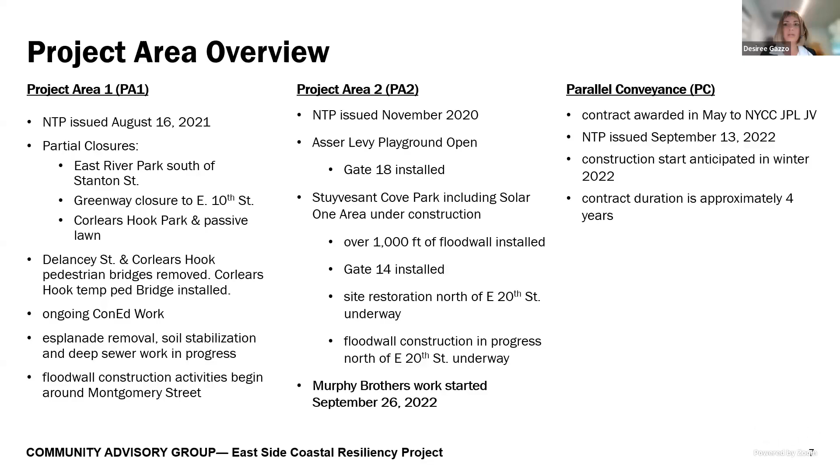For PA2 construction progress, we're familiar with this illustration. The work is finishing up in the northern part of Stuyvesant Cove Park, anticipated to open in November once the planting is done. Murphy Brothers work just started, and work will continue down in Stuyvesant Cove Park to the south. Hopefully by the next CAG meeting, this map image with the work areas will change.

We did just present to CB6 last week. The presentation is up on the ESCR website, and there we presented updated construction photos. If you're interested in a deeper dive into PA2 progress, please go visit that presentation.

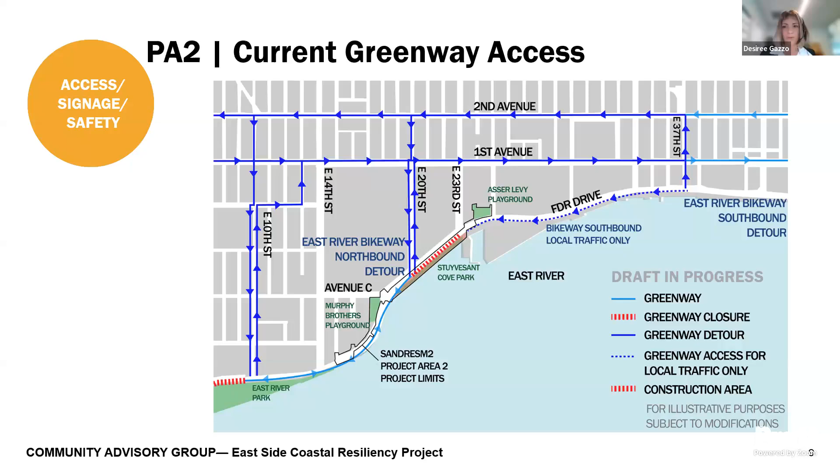For PA2, the Greenway access, we've been presenting that there will be an upcoming change once the northern part is open. This is the current Greenway access, which everyone is familiar with by now, and this is the look ahead, which we've presented the past couple of CB and CAG meetings. This is still draft in progress, as labeled before. Essentially, the Greenway between 20th and 23rd Street will reopen sometime next month, mid to late October, and that will change the detour and what it looks like.

Also sometime mid to late October, the access between PA1 and PA2 may be closed off, so that the PA2 contractor can finish that work in the southern portion. We are working in coordination with DOT now, and as we coordinate with them, we'll have more details and dates to let you know.

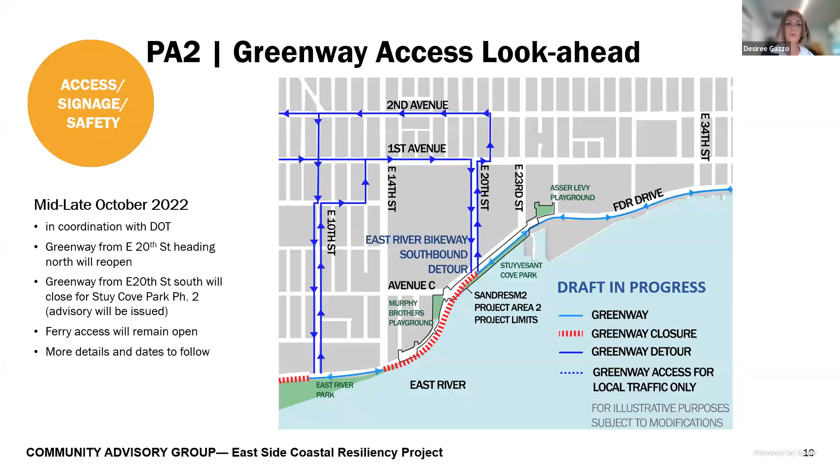This is the same detour we've been presenting, still in progress. As we have more information, an advisory will be issued. We'll let Paula and Tara know, and that information will be shared with the CAG.

For PA1 construction progress, this is a graphic we're hoping will be more similar to the one we show monthly for PA2 — an illustrative graphic of the progress of construction work. The green areas are essentially East River Park proper, the main portion of the park. The blue lines are the bridges and overpasses, and the flood walls and floodgates are the beige line. There are a few up in the north, but we didn't delineate that here. This is the main portion happening currently.

We did have the more detailed schedule we'd provided in the past. This is a little more presentation-friendly and based off that schedule, and we'll use it similar to PA2 to show that progress and speak to the progress of the project moving forward.

For October 22 construction activities, the work is progressing in a steady fashion — not much has changed. The soil stabilization activities, esplanade dismantling, and deep sewer activities are continuing. The Delancey Street utility pile and abutment work on the park side is moving forward, as well as the Corlears Hook Park pile installation for the new bridge.

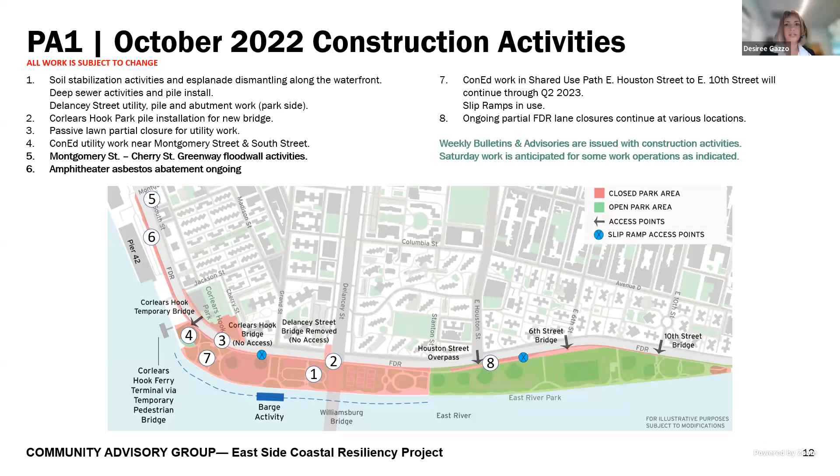For the PA1 AQM August update, there were several occurrences of surpassing the PEL, but they were only for under 20 minutes or less, and there was just one that was a bit higher on the 26th.

And the PM 2.5 levels were similarly all 18 minutes or less. The contractor does get an alert once there is an increase, and then they resolve it through the mitigation techniques we've identified in previous presentations. Again, none of the exceedances surpassed the 24-hour time-weighted average PEL for the month of August. As you could see, it was under 20 minutes on most occasions.

For project area 2, for the AQM, the PEL for 15 minutes was surpassed on 2 occasions. One of those, on the 12th, was for about 58 minutes due to a staged truck for the asphalt paving operation, and there were flaggers directing the public away from those trucks. The other surpasses, on the 18th and the 19th, were after hours when there was no construction activity.

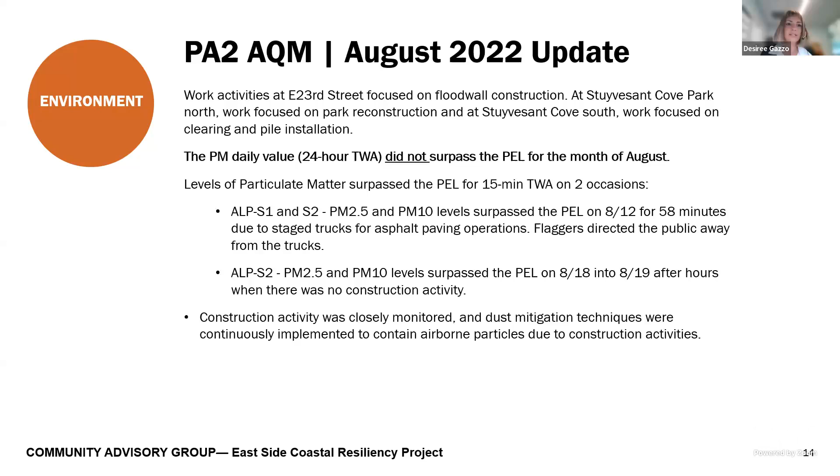Okay, so for what we've heard, the contractor has been working on the lighting within the park. One of the areas that had lighting issues was around the track. At this point, it's going to take a bit of time for the contractor to fix that, so there has been temporary lighting installed.

There are 4 temporary lights installed: one at 6th Street, just south of the track; one along the greenway near the track south gate; one near the track north gate; and one near where 8th Street hits the park, just north of the track. Those temporary lights have been put in, and the contractor has been taking a look at the lighting in the whole park. We're happy to say that this week the temporary lights were put in.

So now we can take questions.

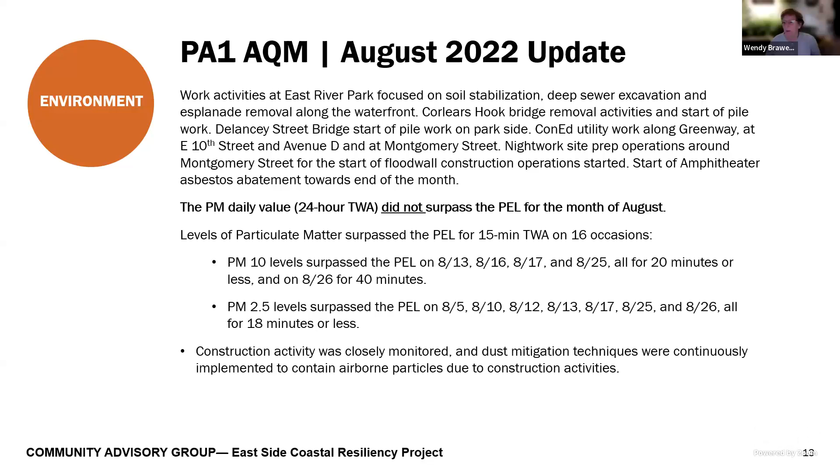So one last question about air stuff and noise. You said that parallel conveyance has its notice to proceed. And I know much of that work happens along Avenue D for 4 years of work. And I wonder what monitoring is planned and how is the community being notified about that?

Sure. So as mentioned, once that parallel conveyance team gets a little bit more activated, there will be a more in-depth presentation, with more updates made on parallel conveyance. Right now, we're reporting on project area 1 and 2, and then once parallel conveyance gets to a point, there will be support and preparation for meetings that include parallel conveyance. Thank you. You're welcome. Diane?

Hi, Desiree. I have a PA1 and a PA2 question. So for PA2, I had a chance to walk through Asser Levy Park a few weeks ago, and I saw sadly that some of the new trees seem to have really not done well during our heat wave. Maybe you reported out on this to CB6, but what happens now and who's taking care of those new plantings?

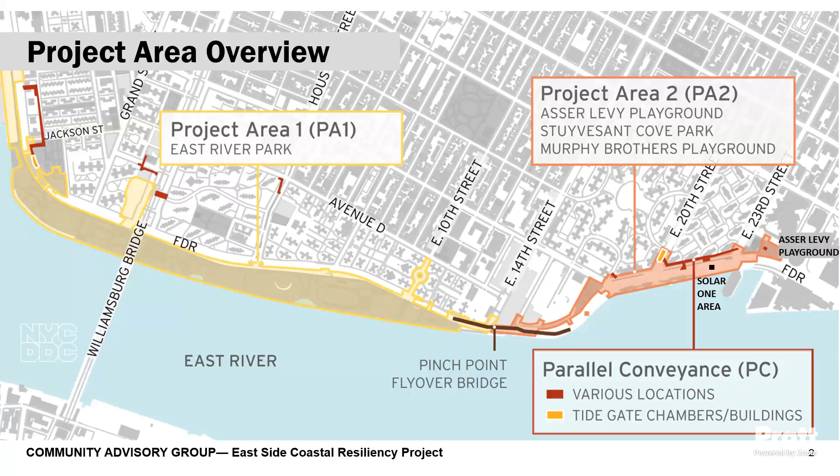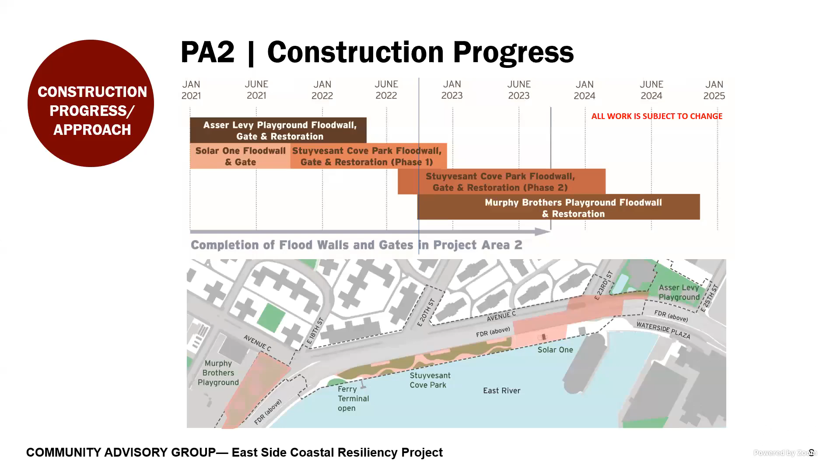So we're moving forward with the graphic representation for presentations. The schedule that was provided at the last CAG meeting is still online and current, and that would just move the progress along as we're moving through the project.

But for the presentations we're moving to, similar to PA2, a more graphic presentation. Are we going to be able to get that updated construction timeline presented quarterly to us, at least? Because it definitely gives a lot more information than this graphic version.

For instance, it breaks down the bridge demo, Corlears Hook Park, bridge demolition, remove excavation. It breaks down phase 1 into approximately 14 subcategories, phase 2 into about 11, with much more detailed information. So Desiree, that progress schedule is intended for the project management on the construction, not for the general public. What you have here, this graphic, is fully intended for the general public so they can understand the phasing of the project and how things are going to move along. I strongly believe this suffices for the community needs.